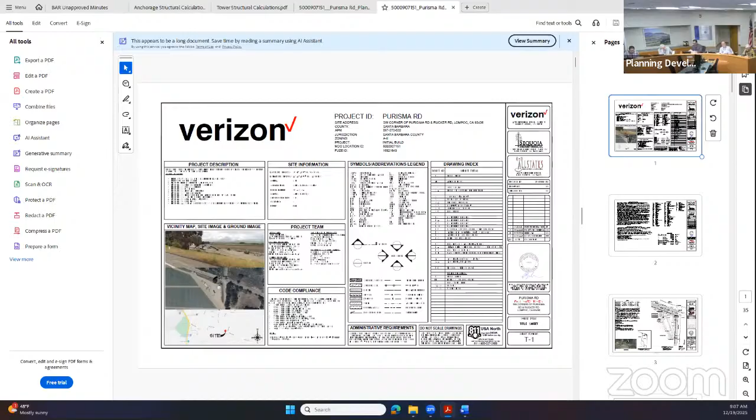I believe since the last time we met, there was some more information requested about the tank legs, more structural information. We have since provided our construction drawings, which give more detail and hopefully can answer more of the questions you guys may have. That concludes my brief presentation, and I'm open to any questions you guys may have.

Can we see the project elevations for it? The construction elevations?

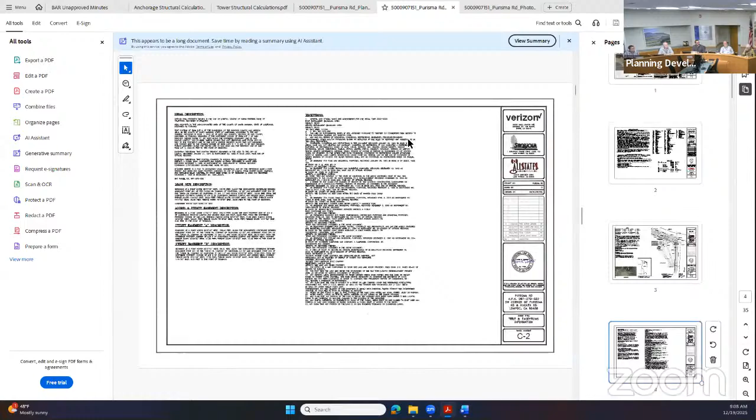There are separate pages towards the back of these drawings that have the tower construction info, which might have some of the information you guys are looking for, but just wanted to give you that piece of information.

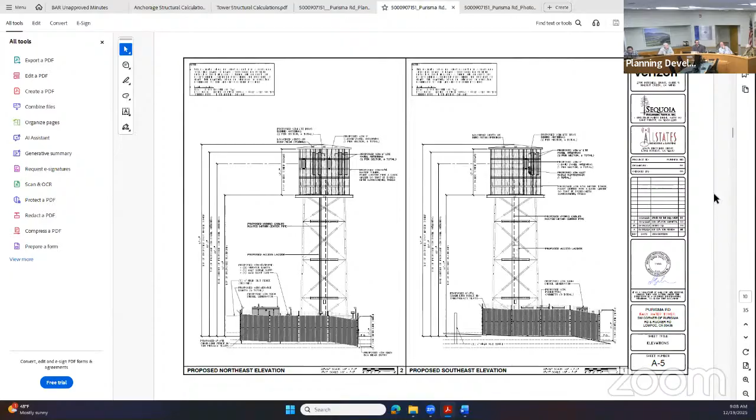So you said you beefed up the lattice support on it? Yeah, we had improved the lattice support from previous iterations. I think since the last time we've already upgraded them, but we weren't showing the specific information you guys needed to see that they were beefed up.

So if we would go down quite a few pages on these drawings, I can show you what the dimensions are. Well, maybe you can just inform us what the member sizes are. I don't see those noted on there.

The cross bracing, yeah, so it looks like the bracing here, the center pipe is 20 inches, I can tell you that much. I don't care about the center pipe, the legs are 6 inches, right? Let's see, 6 inches there.

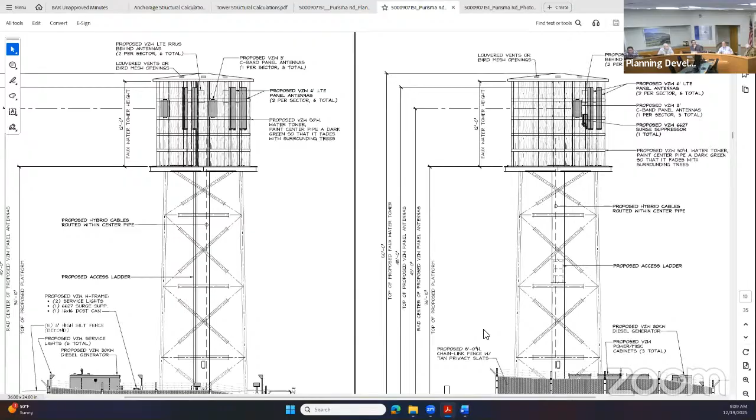Armando, what page is that on in the drawing package? We're on page 28.

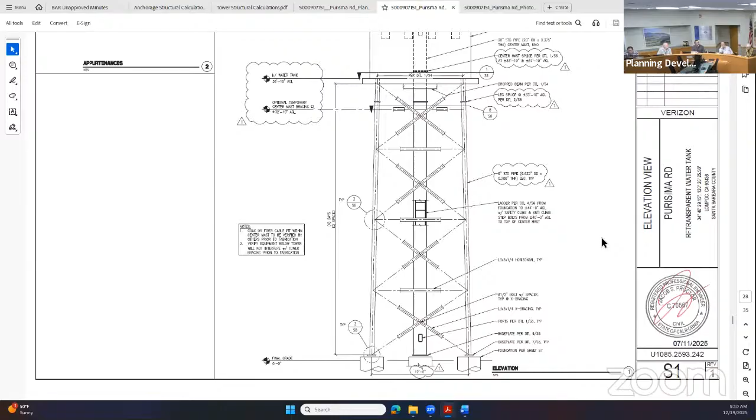There's an attachment detail there. They're 3x3s. What is the detail, is it 3/S6? Can you go to S6? That's what we asked for, sheet S6.

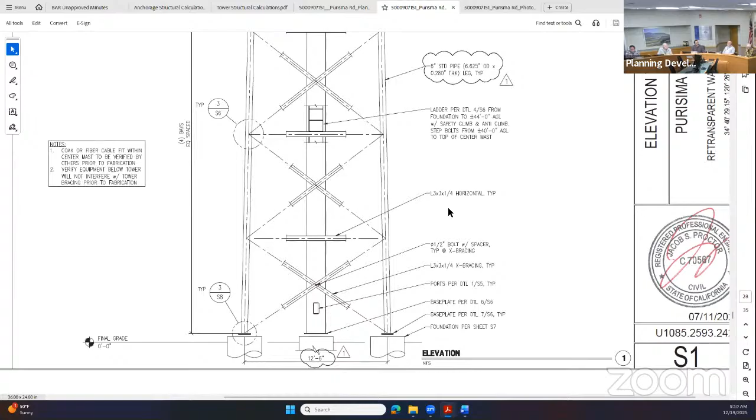Okay, detail 3. Yeah, down at the bottom of the page, probably. Yeah, there it is. Okay.

So your X bracing is full on 3x3? Yes. Okay, and the horizontal member there is what? Also 3x3. Okay, okay.

Does the board have any comment on what has been provided? No.

Well, then at this time, I'll open it up to public comment. If we have a commenter, please introduce yourself for the record, and we have 3 minutes for your comment. Okay, I need the picture of the site location up so we can look at this while I make my comment. I need to reference that.

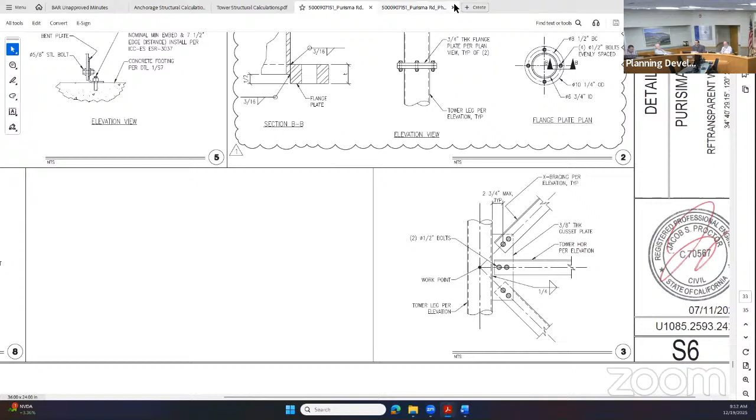This one? Yes, please. And go ahead and introduce yourself for the record. I will, thank you. My name is Karen Hallenstein. I'm a resident of Lompoc Valley. I'm also here representing the landowner right across the street here from where they're proposing.

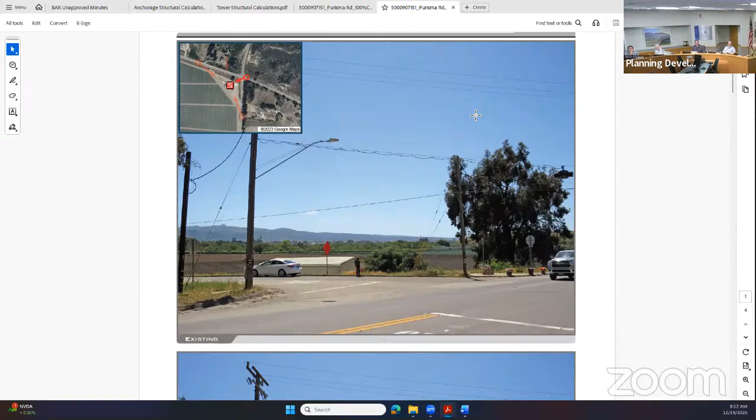Karen, can I ask you to stay by the microphone, just because it won't be on record? Okay. You really would have to, because you're dealing with aesthetics, okay, and you would really have to visit her home. We can show you exactly what she's going to see from sitting on her porch where she sits every day for hours. The fact that this applicant has not considered a different location on the property that does not offend and severely affect the homeowner right here, her house is right here.

Karen, I'm going to ask that you please stay by the podium. Thank you. Because of the precedent this county has set in the past regarding people building in other people's horizon lines, we already have a legal precedent. The homeowner is asking Verizon and the Campbells to move this location so she doesn't have to look at it. That's on record.

Is there any, you can consider whatever from that. You have to consider Jody Neeson's home, and you guys should visit her house. Really, you're getting paid to do this job, aren't you? Thank you, Karen, you have to use the back. You locked me in here. That's okay. Have you guys been listening to my comments at the Board of Supervisors? You should. Thank you for coming today. Yeah, thanks.

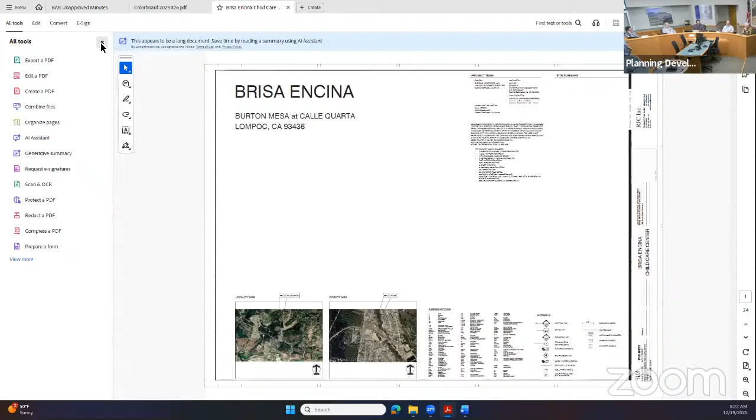Good morning, members of the board. My name is Pablo Romero, and I represent Firebird Development for this project, the Brisa Encina Child Care Center. At the last board meeting, we understood that the project was well taken, and in general terms the board found it agreeable. We were requested to come back with detailing to clarify how we were visualizing achieving the imagery provided in our elevations, so this is what we've come back to present.

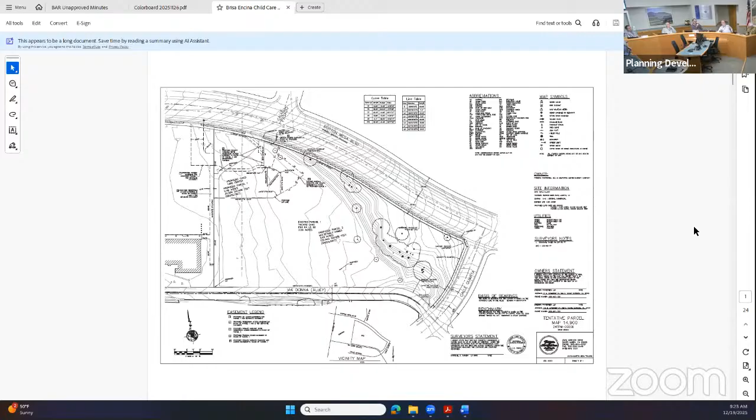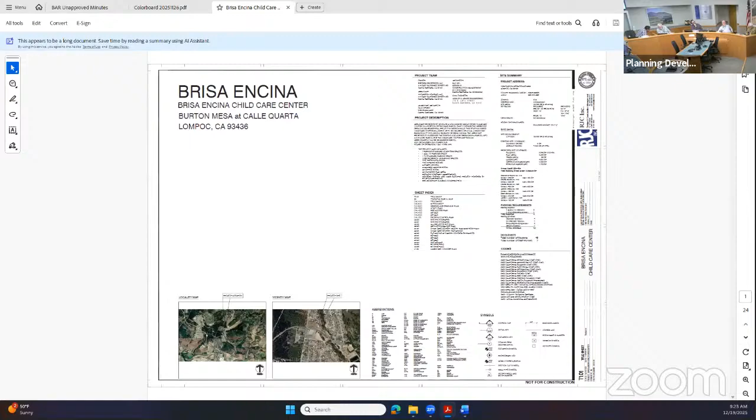I can do a general overview. If we could go to sheet A003, the architectural site plan, probably sheet 14 in the PDF. So our building is sitting adjoining the Brisa Encina Apartments development, at the northwest corner of the site.

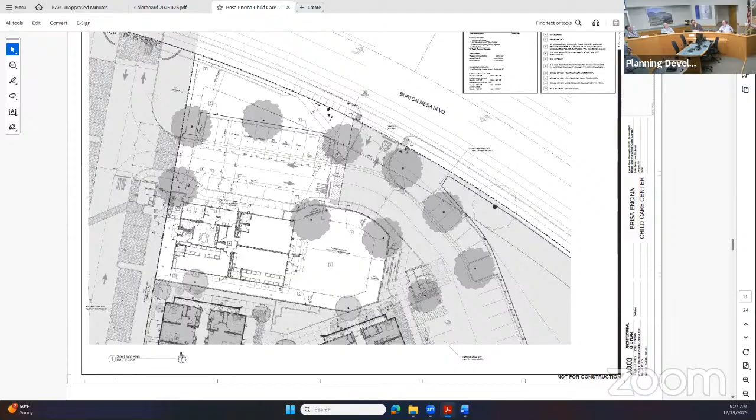It's an entirely independent subdivided parcel, and the building will house a childcare with a few rooms for different age groups, admin services, and some other staff support areas. We have independent parking provided for the childcare operation, with some drop-off areas also included. We're setting it all the way back to meet the setbacks along the west and south end. We have a playground area east of the building, and that completes our site plan.

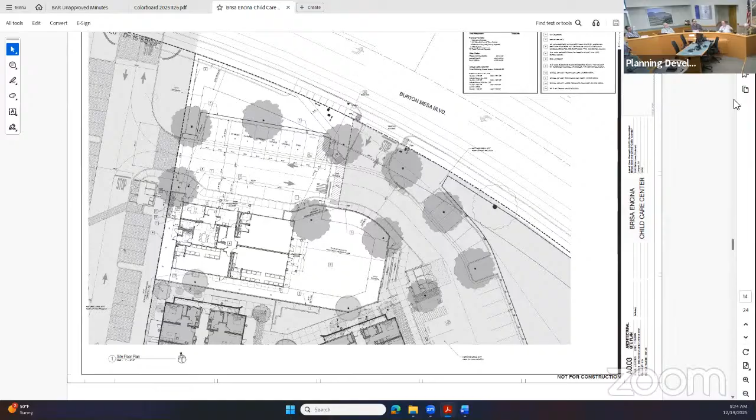If we could move forward to the next sheet, please. This is our floor plan and roof plan. We've discussed that this will be a modular building, pre-manufactured, made up of what we expect to be 8 modules running longitudinally from east to west and mounted on site on concrete foundation on stem walls. The modules will come pre-finished all the way to the waterproofing membrane, and then once on site, the final stucco finish will be applied, as well as features such as parapets, terracotta tile detailing, and the awnings and entry structures.

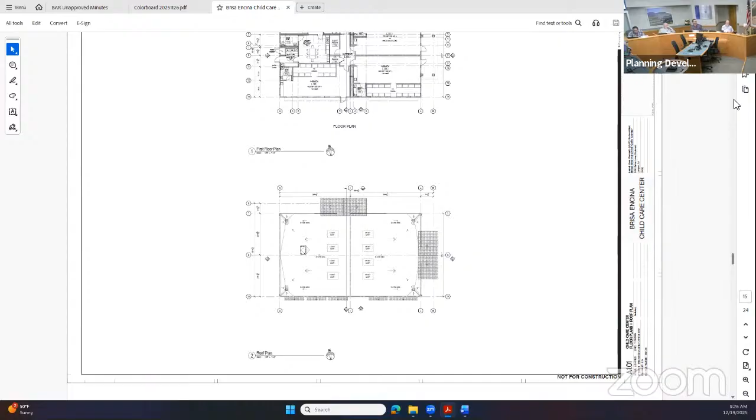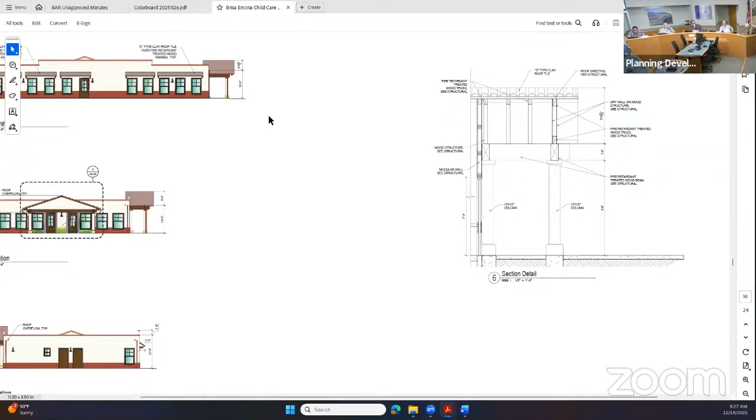Soren, were we able to upload the most current drawings we sent out? Excuse me, because this probably will not have all the details. Did you download... Yeah, this is what was uploaded and I downloaded this morning. Oh, I'm sorry, Pablo, Soren's off today. Was there something specific you sent to him that you're not seeing here? Just by seeing this one, it means we don't have them. These are not the most current, but okay, I'll try to see what this one accounted for. We did send an updated set which had a little bit more detail to it.

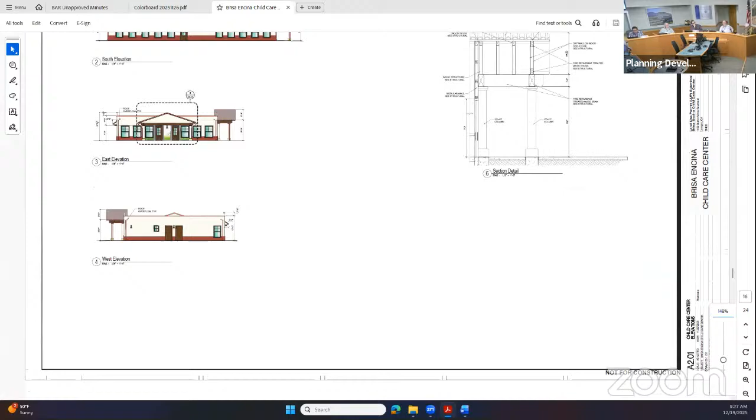At any rate, if we could jump now to A401, sheet A401, two sheets down. So in here we start detailing the typical walls we will be using. Most of this has to do with general construction, general building types.

Let me see, just because it's a little different. I think detail C6—I'm sorry, detail 6 will be our typical perimeter wall. Our wall structure will be made out of 2x with finish with wrapping on the outside. As I mentioned, that's the final coat. That Tyvek wrapping will be the final finish on the modular side, and then we will site-install the 3-coat stucco on site. So it comes all the way to the backing, the plywood backing and waterproofing membrane, and then 3-coat stucco gets installed on site. We have a series of... excuse me?

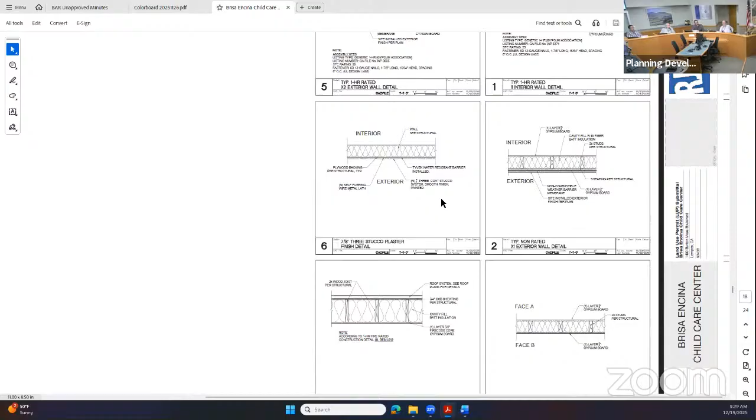Does this set, if you're familiar with it, have the window trim and parapet details on it? I hope it does, that would come in the following sheet. We can jump into the next sheet.

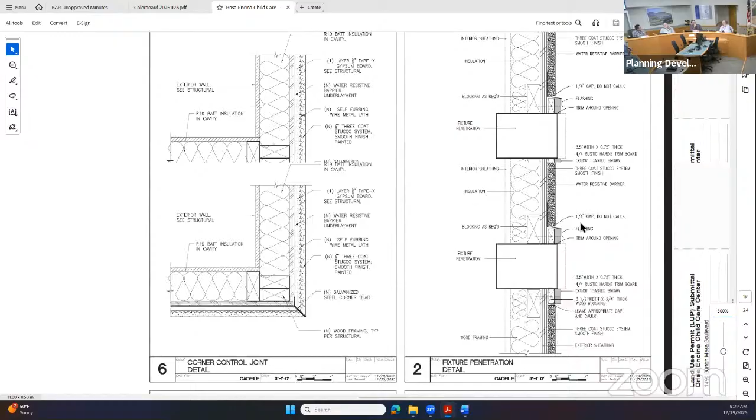Yes, so, detail 1 is our header detail. If we can zoom in a bit into detail 1, please. There we go. So again, we've got the water resistive barrier and then trims. The detailing of trims will include a double detail for flashing, one below the header and one above the trim, and that's basically our detail for windows and doors as well.

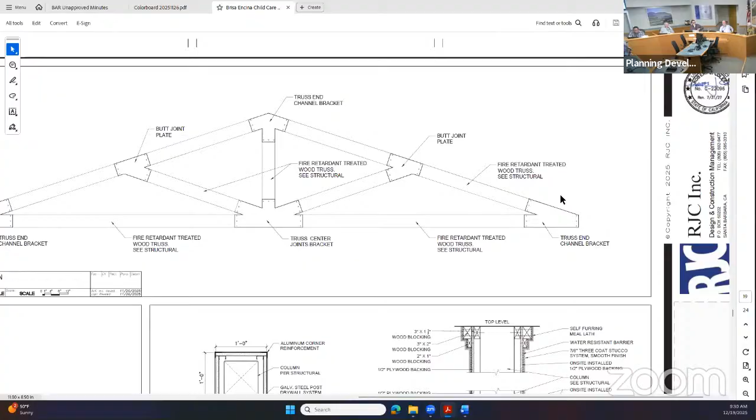Detail 2 is just a detail we're throwing out there in case we end up having any type of penetration, which we most probably will. So if we could scroll down to detail 2, similarly, it will be trimmed out around the perimeter, very similar. Detail 3 is a jamb detail, shown in plan view, but very similar and consistent with the header detail. Detail 4 is our detail for the window sill. We can scroll down, yep, a little bit less please, it's just loading.

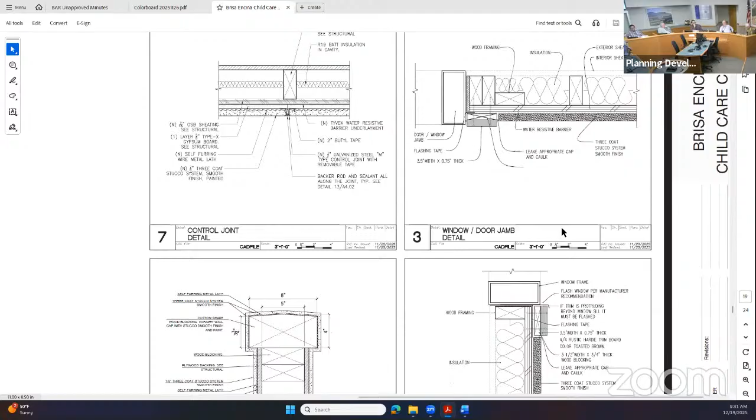There you go. So again, consistent with the rest of our header and jamb details, this is how we address our window sills.

Next to it on detail 8, parapet finish. Some instances where we're going to be thickening it, and it will be rounded out with stucco as well. We do keep another detail in hand, as sometimes it's not as robust as that one.

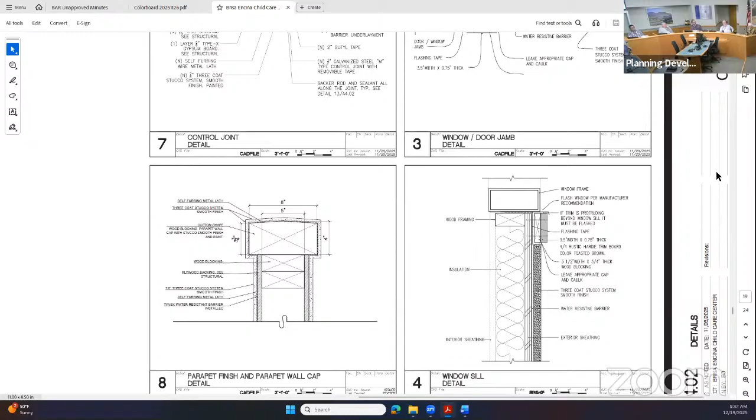Can we scroll up to detail 5, please? It's at the top. So similarly, in this instance, we're just creating that thick trim line with metal capping. We're also adding details for our corner control joints, which is detail 6, and a typical control joint, which is detail 7.

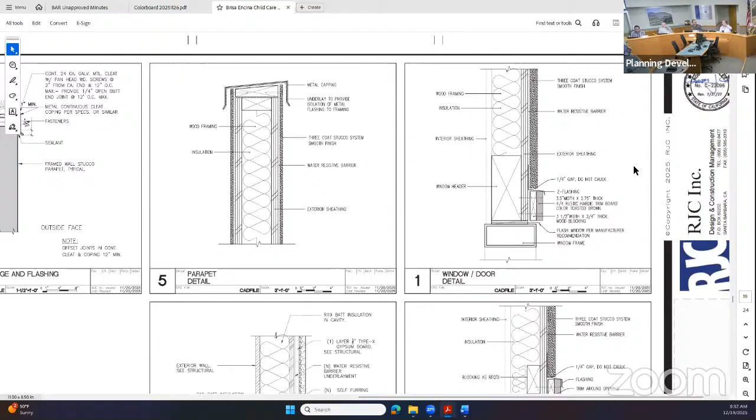If we could jump into the next sheet. A403, I think it is. Yes, here we have a detail of our column. Detail 2 is our detail of the column.

The gable truss design is, of course, very schematic. It will be dependent on structural, but the reality is that they won't be visible because the whole triangular portion of the frieze is finished in stucco, so this will not be exposed. So it's really not an item for aesthetic review.

But detail 2, as I mentioned, that's how we are building up our columns. It's basically a frame, kind of a slightly elaborate frame with different pieces of 2x, some of them rounded to manage that shape of the column base, and all of it is finished in the same stucco.

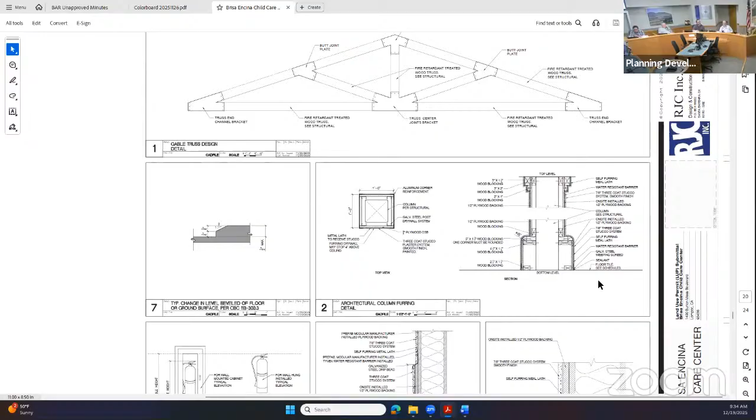One of the questions we were asked at the previous meeting was how we are foreseeing treating that thickened stucco at the bottom, the baseboard. So detail 3, if you scroll down a bit, precisely details that padded base, which is basically the addition of a plywood backing to create that bump up, and it's of course completely flashed on the transition, and that's our baseboard.

And if we can continue scrolling down, details 5 and 6. Yeah, that's probably the one that was not replaced. That's one of those that was not replaced. In terms of visual expression to the outside, the details are still valid.

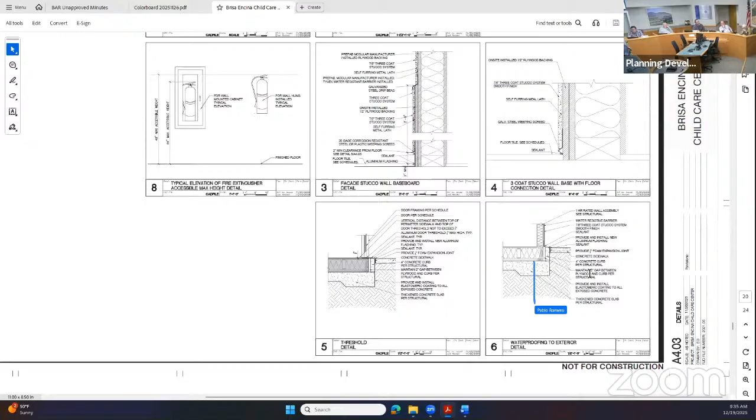The difference basically resides in that, in reality, this will be a stem wall foundation with crawl space underneath. So concrete underneath here will not exist. It's rather that the module floor framing will be sitting above a footing, stem wall foundation, and then the rest will be a void underneath the structure. So that is the change. That's the detail that did not change.

But again, in terms of the expression of how it's read from the outside, it's still a valid detail.

Pablo, do you have a detail showing the connection of the field-built parapet on the modular structure? We do not have a per se connection; it's typically just a 2x that gets added above the rim joist on the module, and then it grows from there. I don't know if we have a full blown one here.

So you're bracing it back into the roof? That is right.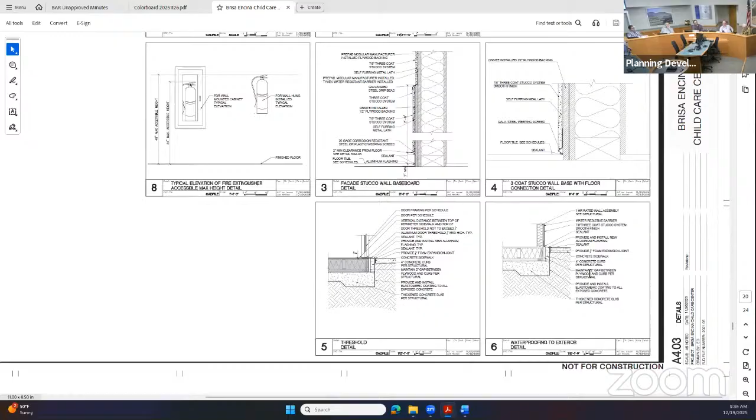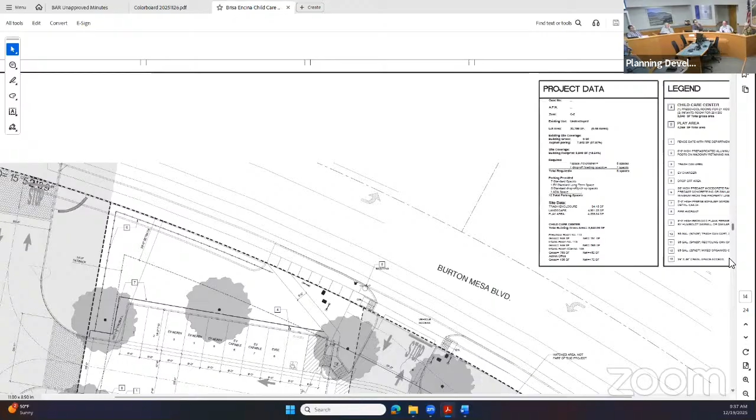Can we go back up to the roof plan, the floor plan and roof plan? Yeah, go back down to that roof plan. That one. Sheet 15, yes.

So you're parapeted on all four sides, right? That's right, yes. So you'll show some more crickets in there and diagonal bracing? No, there will not be a need for bracing, again, unless we get that determination by structural. But we've done a couple of these type of buildings, and it has not been required to add any type of bracing for the parapets. They're not that high.

And in terms of the cricketing, yeah, that's all shown now. Isn't one of the jobs of the parapet to hide the HVAC units, right? That is correct. And that's why we're centering them where the parapet grows a bit.

And have you submitted construction drawings? No, we have not. What's your timeline for those? In terms of how fast we could produce them, well, just your schedule of how you're submitting all this. Right now, we didn't have CDs and building permit in our scope of work at this phase yet. We were just on the planning phase; that's what we were addressing at this time. We were waiting for, like we've typically done, planning approval and then moving into CDs.

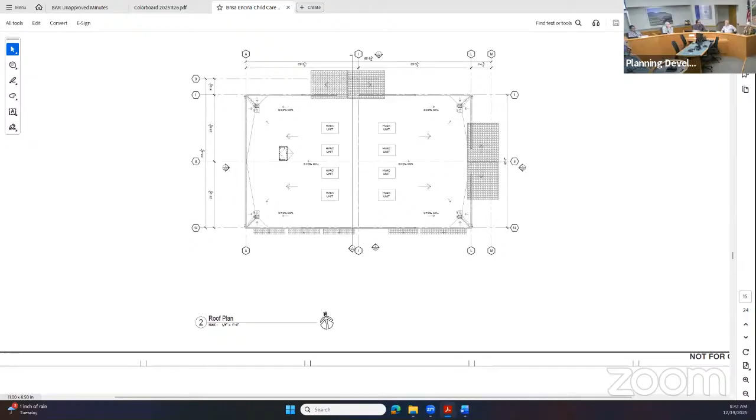So that's the ones that the board saw last time. They should have building details, landscaping plan, but it doesn't say anything about actual CDs. Pablo, we've seen the landscape plans for this, right? No, not yet. Do you have landscape plans submitted? We do have landscape plans down the line. If we can keep scrolling down, let me see.

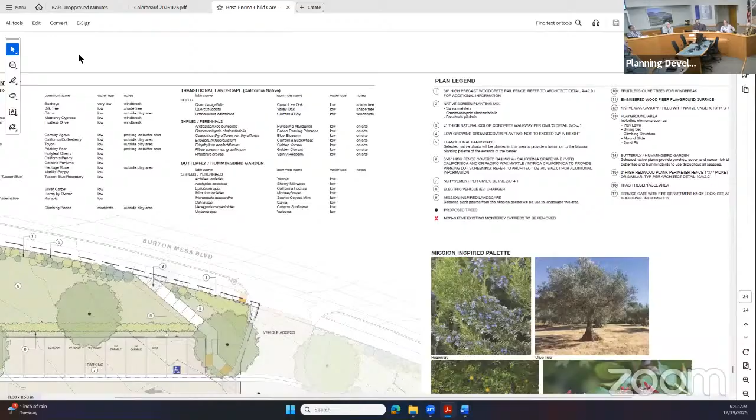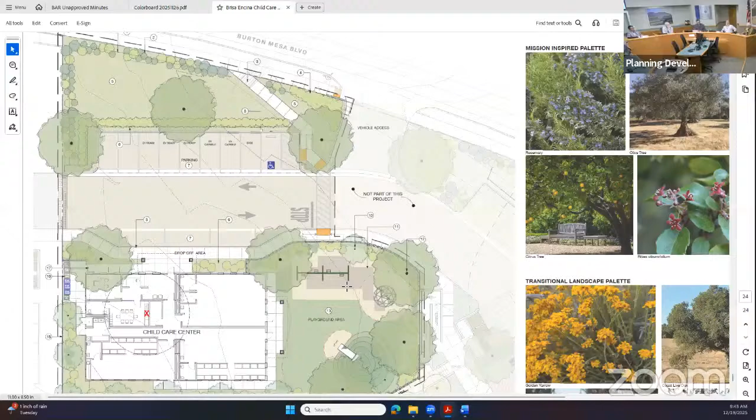Oh, but again, if these were not the ones that we sent yesterday, we'll not have land irrigation. Yeah, that's the same package we saw last time. Yes, I do have the irrigation and the package we sent out, but it appears that it didn't make it through. And I wanted to see the drawings that support the installation and construction of the landscape, much like what you've done with the details. And yes, they are in the package that I have here, but unfortunately it didn't make it through.

Okay, it does have irrigation plan, irrigation details, as well as landscape installation details. Yes, and definitely a more thorough planting plan. And what the information packet says for landscape plans is that it needs to list the names of the plants, sizes, quantity, and location, and then the irrigation type to be noted on the plans. Correct, which is what is not in the set that we're seeing. I understand that. Okay.

So with regards to our progress on this, you are agendized for final approval without seeing the landscape plans. I mean, I think we're all comfortable with the details he's provided for the building itself and that it represents what you've proposed. We will need to see those landscape plans to grant final approval.

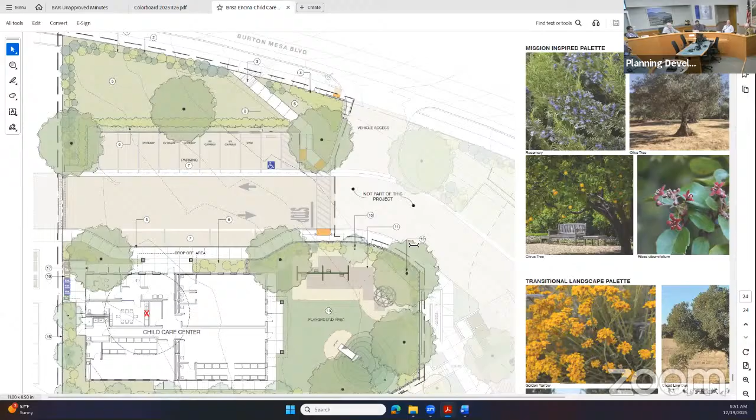So I think if the board has no other questions with regards to the architecture of the building... Actually do. Okay. I'd like to take a look at the front, and I think it's the east elevation renderings. Yes, main entrance and the side entrance to the little park in the back, the outdoor play area. That would be sheet, I guess 17.

Yep, that's it. My question is, we have been assuming that each time we've seen the next iteration, that the rendering of the artwork around the door on both elevations is sort of what we're going to see. And I think I heard somewhere along the line that it was an indication only. So I guess, when do we get to see what the final is going to look like? Because it's pretty much integral to the building, I think. I mean, is this what we're going to see? Is the way it looks right now what it's going to be? Or is it going to be something different than this? I don't think we own the rights for this, it's just stock imagery that we use, but it was the theme.

Frank, were you—I think we had discussed about engaging with a local artist to generate something along these lines? Yeah, we had not done it yet. Yeah, this I'm sure was taken electronically from somewhere and was meant to be representative, not definitive. I'm sorry, it was meant to be representative of what the final product would look like, not definitive.

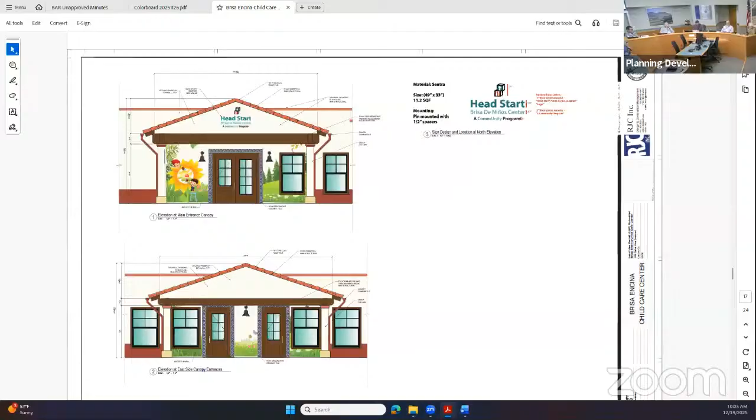Okay, moving on to item number 3, BAR 2500100, the LeBlanc signage. Aaron, if you're ready, go ahead and introduce yourself for the record and begin the presentation.

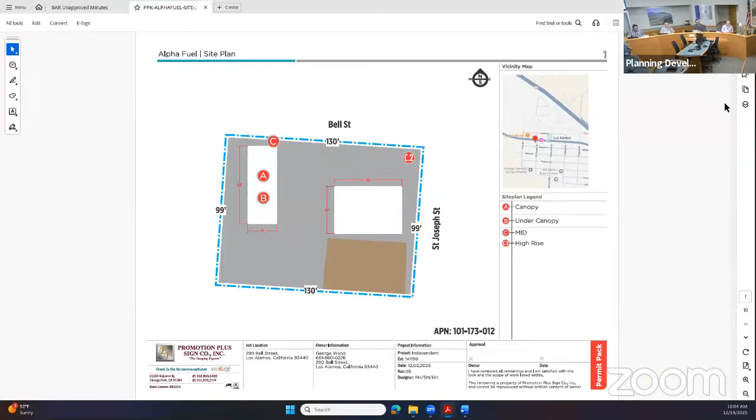Greetings, Aaron Hamilton here representing the current owner, George Wanis. Is my audio okay? Last meeting, I was told there was some buzzing. It's better. Do I need to be muting between? No, I think what's happening is because I can hear myself in your speaker. I'll turn it down a little. Okay.

Ready when you are. We've done our best to tone things down at the site to maintain the aged look of the area and keep in theme with what's already existing. Hopefully you guys are happy with what we've been able to do.

Let's take a look at it.

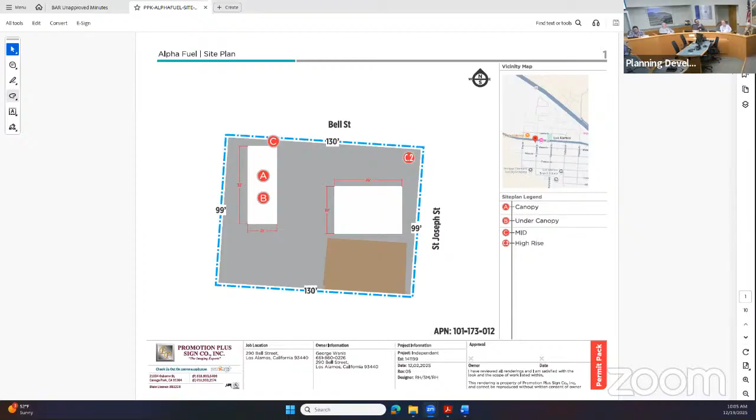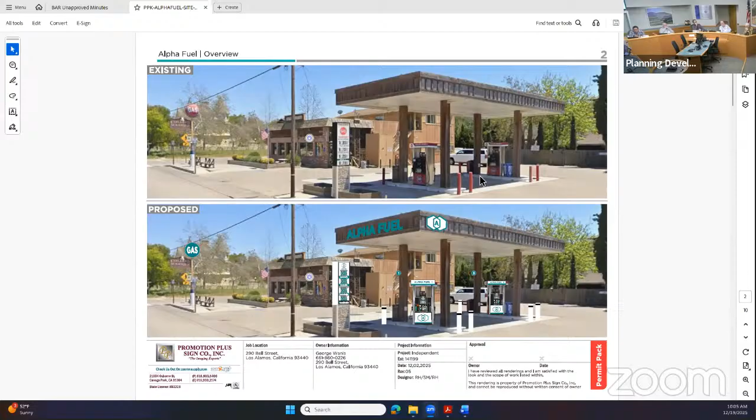On sheet 2 is the overview showing the sign and the canopy. We kept the pricer white, since previously it was white. We took into consideration your comments about the gas sign. It's hard to render the lollipop dome, semi-dome shape, but we intend on maintaining the same shape as it is currently. We toned down the teal so it's not as bright as before, and we left the wood as it is on the canopy.

Aaron, what's the thought on the teal color? It's the brand color, like Chevron blue or Shell red and yellow.

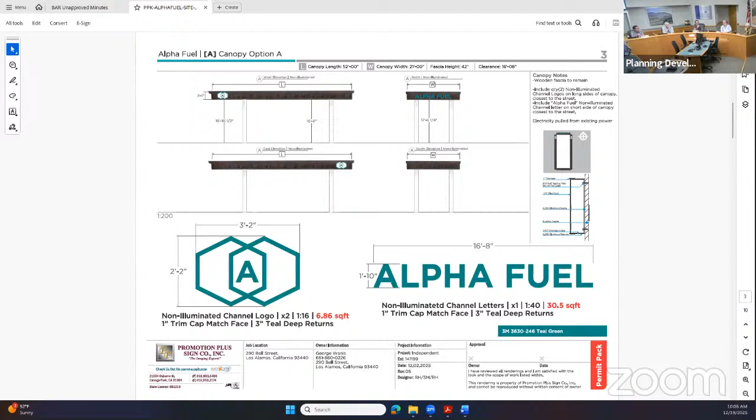Mr. Chairman, are the fuel pumps actually rotated as shown in that previous slide? The previous elevation? Yeah, are the proposed fuel pumps rotated? Looks it, I think it's just a different color. They're rotated, right? Did you rotate them just so you can show us the signage, or are they going to be permanently rotated like that? Is the question.

Sorry, I muted him. Okay, you're unmuted on our end. Wait, how'd I get muted? Anyway, it's just for aesthetic only, it is not a physical change to the pumps.

Okay, thank you. Does the board have any other comment on this? Is it just the fuel island that's being altered, not the store? It's actually just the signage imaging. The fuel pumps, the islands, none of that's actually changing. It's only the aesthetic, so yes, the store is not being touched.

That helps a lot, significant improvement. Yeah, great improvement, thank you very much for the effort. You're welcome, yeah, we tried to tone it down.

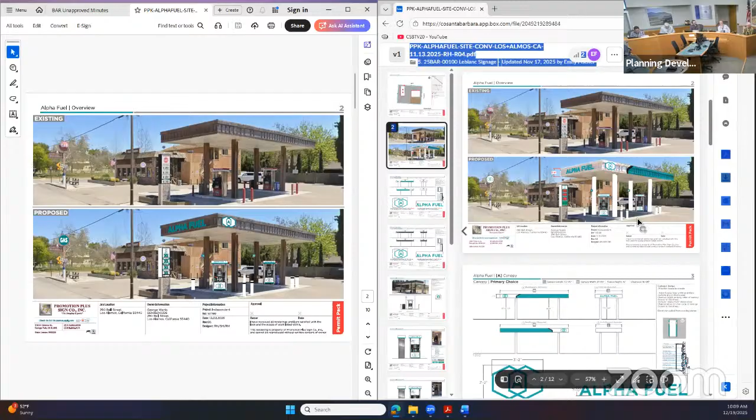I think my only further comment would be on the beloved lollipop. Are you going to do a new shape, sort of a disc rather than a rounded shape? Is that what it's going to be? No, we're going to try - it was hard to render the semi-dome shape that maintains that lollipop, but we are going to, to our best ability, mimic the same shape of the existing gas sign, but merely change it to the brand colors. Great.

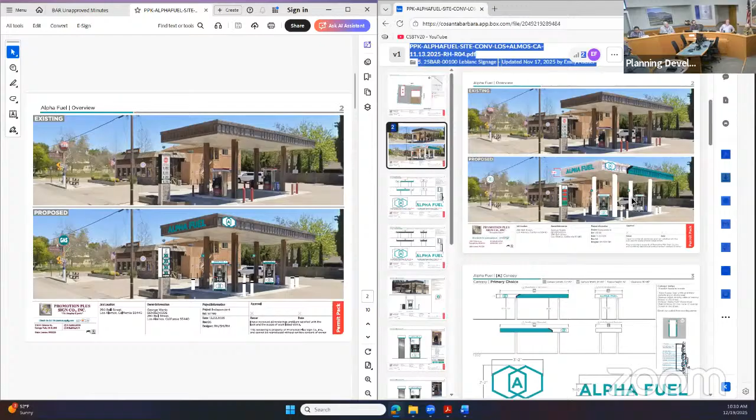And then my other question, down by the sign where the pricing is, it looks like there's space for planting. Do you have any specifics in mind for how that's going to be landscaped, or if it is going to be landscaped? Nope, we're a sign company. Because that seems like that should be part of it. Okay.

Is that planter an existing condition? Yeah, I certainly don't have any information on landscaping since we are merely doing sign imaging. The planter is there unless there's the planning entitlement to require them to do it - there's no change in use here, so there's no planning permit, and no trigger to make them install additional landscaping. But we can put in the minutes that we would encourage them to fill in the planter, even though it's not a requirement. Certainly, okay, thank you, and I would be happy to relay that information along.

Thank you, does the board have any other comments at this time? So this is agended for preliminary and final. Do we need construction documents on this?

One more question - the bumper posts at either end of the fueling structure that are now white as opposed to red, and there's a band around them, is that illumination? No, the only two things that would be illuminated are the pricing sign and the gas sign. The canopy signage, the pump valances, skirts and bollards are all unilluminated. Great, thank you.

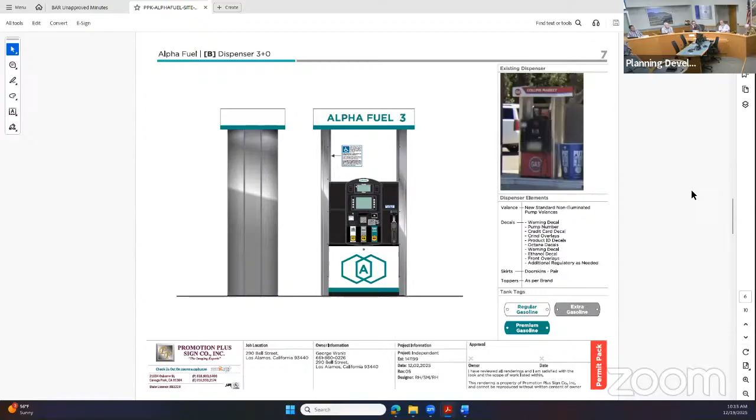As part of your package, do you have attachment details and all that stuff, or is it just the aesthetic that you've submitted for review? We have some basic information if we scroll down. Okay, and that's usually something we hone in on further when building issues comments, but I can say that the attachment methods will have no effect on the aesthetics.

There was one. Okay. All right, so if the board has other comments with regard to this, is there anyone else that would like to speak on it? We do not have any public comment.

Teresa, if any of the board members are speaking now, I am not able to hear them. You're not able to hear me? I am now, okay perfect. I'm sorry, okay thank you. That's on me.

As the board has no other comments and we find that what they've done is agreeable to us and we like, I'll ask for a motion to grant final approval on this. Can I get a second? Second. All in favor, say aye.